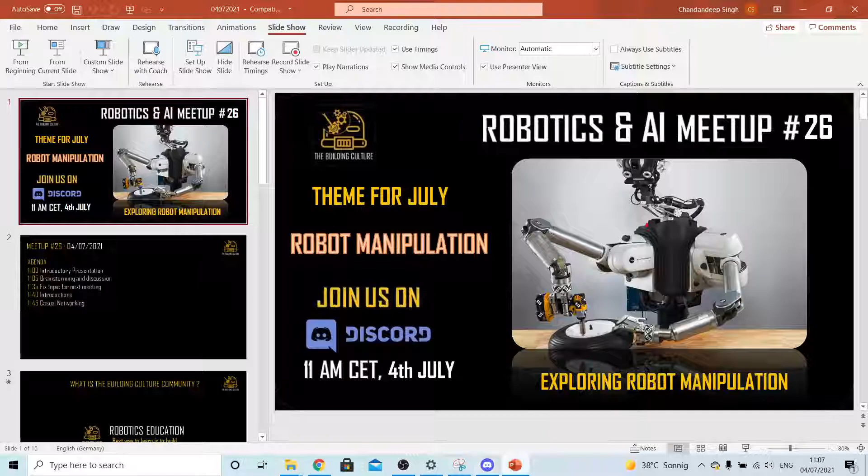Okay, so this is a Robotics and AI Meetup number 26, and the theme for July is robot manipulation, generally talking about different applications of it. Today's session would be exploring robot manipulation in general, and in the subsequent session we'll take up one particular application and dig deeper into it, try to understand maybe one pipeline, and also deconstruct a few existing products in the realm of robot manipulation.

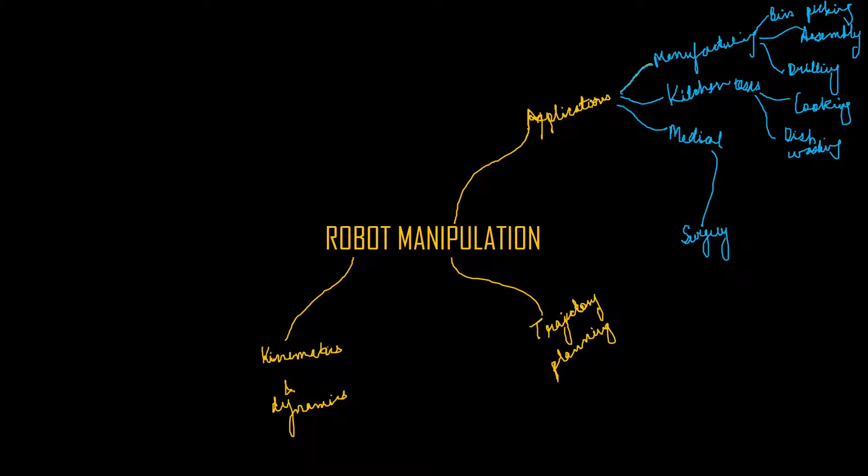Yeah, so bin picking would be one part of it. So about other subject aspects, maybe we can get back to the subjects now. So these are some applications.

Of course, artificial intelligence. Maybe we can just have one broad category for all these algorithms that we have. Computer vision we can add as another one. No, actually, computer vision itself is another subtopic in robot manipulation. Like we have visual servoing in robot manipulation. I think it should come as a subtopic under robot manipulation, not directly under artificial intelligence. But it's a subcategory of artificial intelligence essentially, right?

Reinforcement learning, machine learning, computer vision, all these things are actually under AI. And even if we are using machine learning, that's directly applied to robot manipulation, but just to give a category of all of these things.

Okay, so with computer vision, we don't need to expand this too much, because computer vision has plenty of topics. But visual servoing you mentioned. Even for measuring parts in industries, for the metrical purposes, we use machine vision on robots.

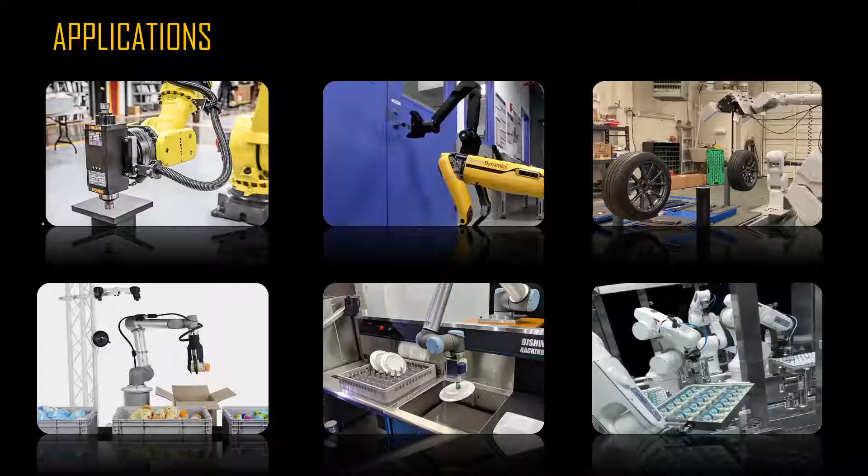Talking about applications, there's tremendous utility of robot manipulation in the real world - drilling and stuff, chamfering, drilling, maybe inserting a peg in a hole. These manufacturing operations, measurement, teleoperation, all these kinds of things, and opening a door, which can also be in office areas, homes, and a variety of different applications. Then assembly of wheel hubs, and pick and place - this has very wide utility in a variety of different industries.

This can be done, then there's dishwashing, then there were kitchen robots. We covered one aspect of robot manipulation in a lot of detail, right?

How computer vision pipelines can be used to actually cut vegetables, boil, cook, or do all these kinds of operations, and also for packaging. So there's actually a lot of applications that we can cover as well.

Is there any other interesting application anyone wants to talk about? I think we covered broadly what would be interesting.

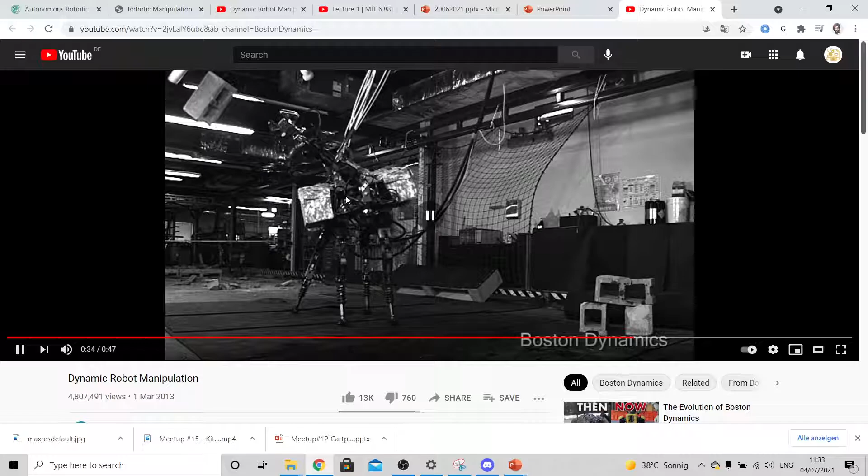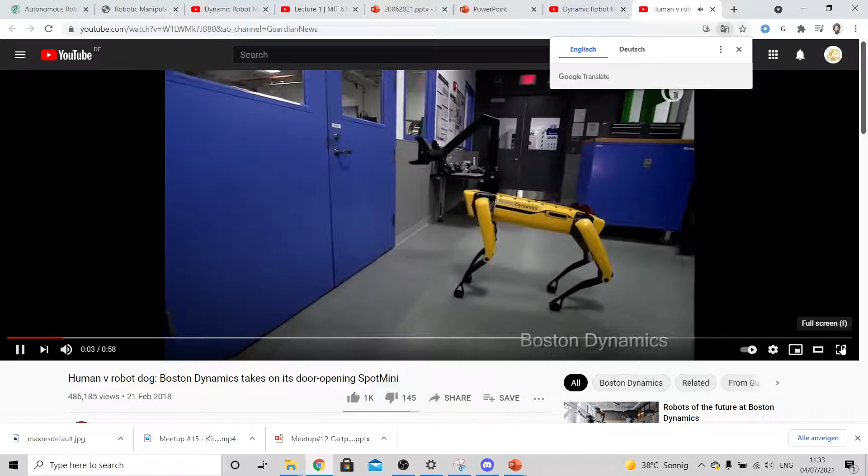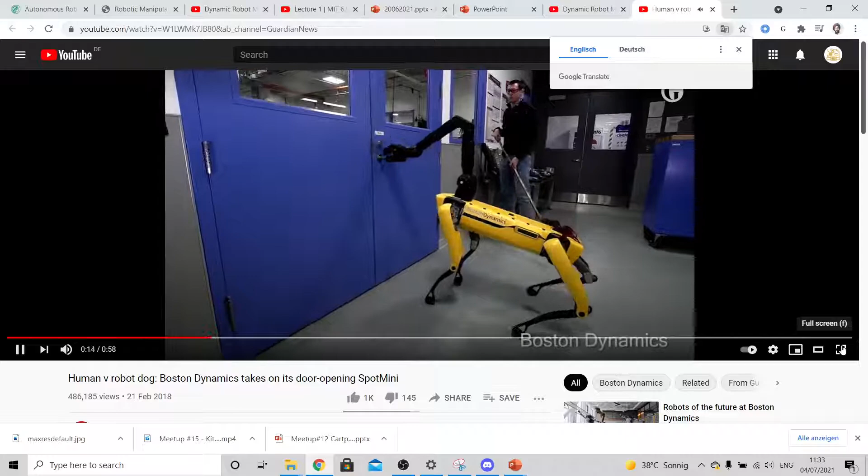This is one example of door opening. This one probably most of us have already seen, right? Yes, so this one adds more challenges - despite the fact that opening a door is a challenge in itself, couple that with the difficulties this guy is adding.

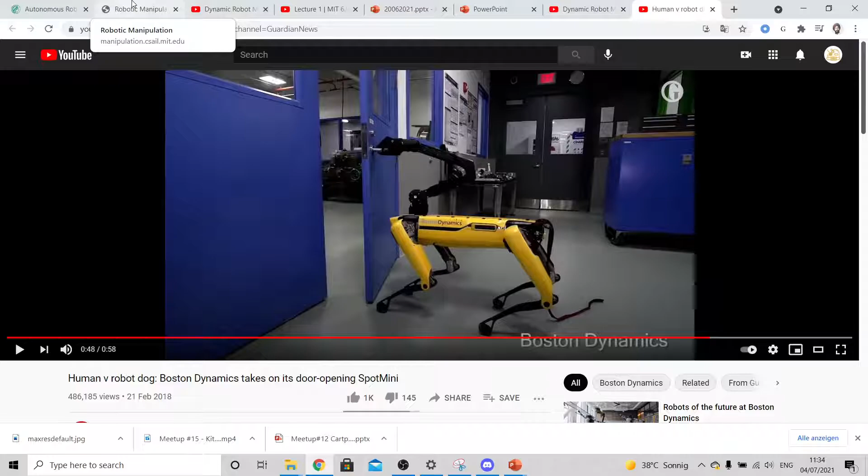Do you guys have some suggestions on videos, articles, or anything related to manipulation? There was actually one - Kuka Robots playing tennis. I think everyone must have watched it already. That table tennis one, yeah, it would be an interesting one.

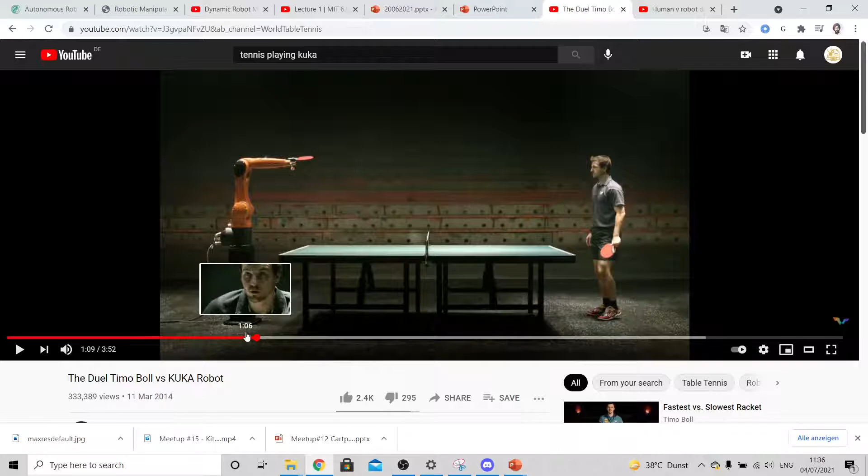I think this part was where it was actually serving the ball. Here we can have a look at it, that's very close - complicated. I mean, how did it plan in that way, its motion itself, to serve in that particular way?

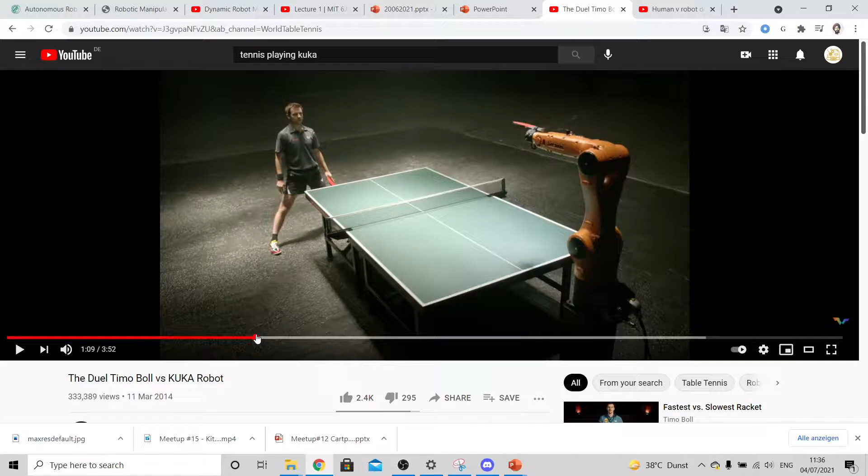Yeah, I think it was must be predefined. I think the ball is also kind of mounted here, so was it holding it? Okay, it will leave it. Otherwise it would be super challenging, right? If someone throws the ball from outside, then it would definitely have to track the ball as well.

Yeah, definitely. And this one I think they've mounted first. Okay, but if you see how it serves, that also is very complicated actually. Let's see it again.

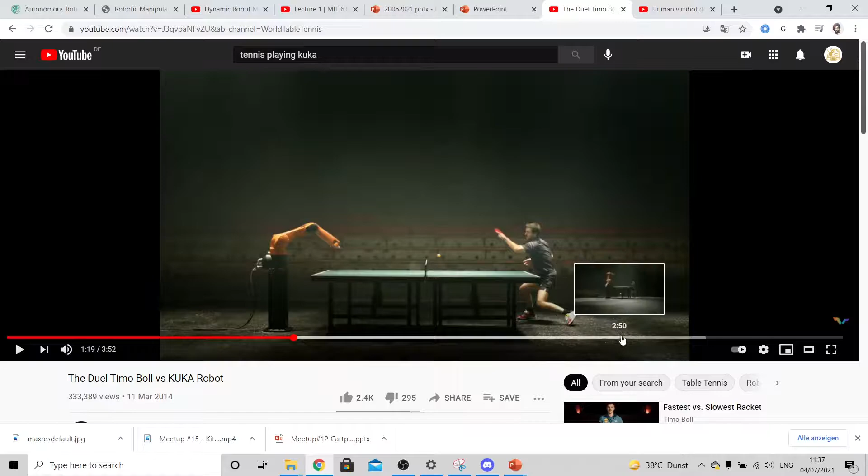Does it have a camera mounted on its arm or is it somewhere else? Not sure, I'm not sure if this is shown in this video. Actually this video was more for advertising, I guess. Advertising, definitely. But I'm not sure, let's see if there was some camera or something.

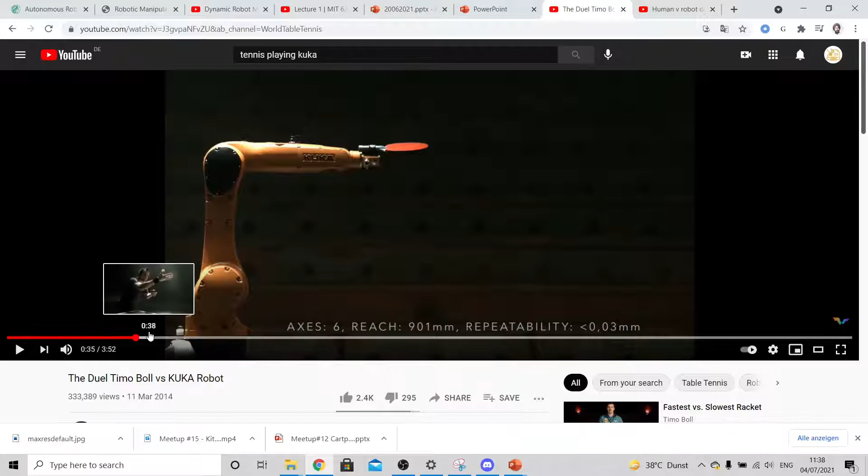Actually, if the ball is kept on the robot itself, then for serving it just has to do a series of predetermined steps. But yeah, I think after the main playing part is where it needs a camera. Nowadays it can learn itself using imitation learning - one can manipulate the arm in that sense, and it will do it the same many times till it achieves replicating the task.

Yeah, I think imitation learning - or okay, there was one video on imitation learning itself. I forgot, it was on Steve Brunton's channel. I forgot. Can you pull up the Steve Brunton reinforcement learning video?

Anthropomorphic means like human form. This video is a bit slow, so bear with me, but it's just 2 minutes in total.

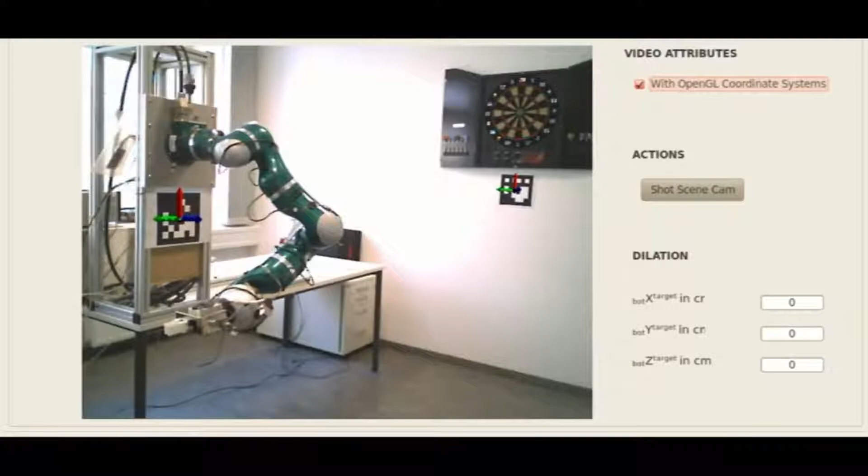Where is it hitting actually? You can see in the bottom. Ah, okay, bottom corner. Ah, so all are at the center.

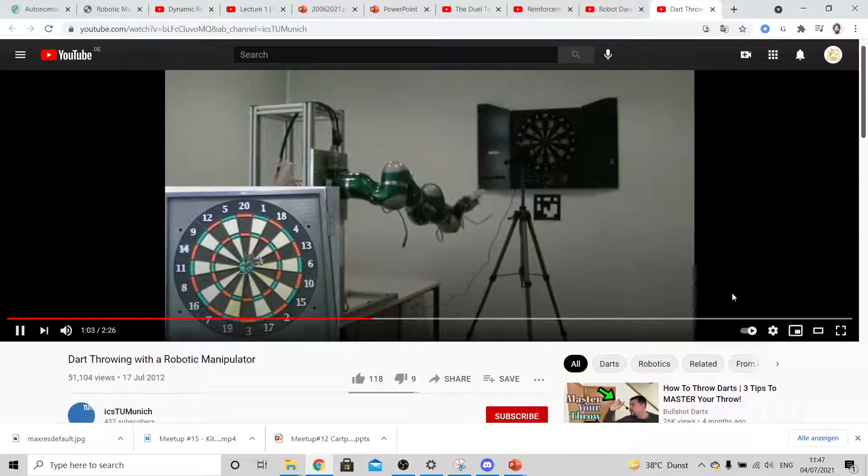How old is that? I think 2012, so it's pretty old actually. My God.

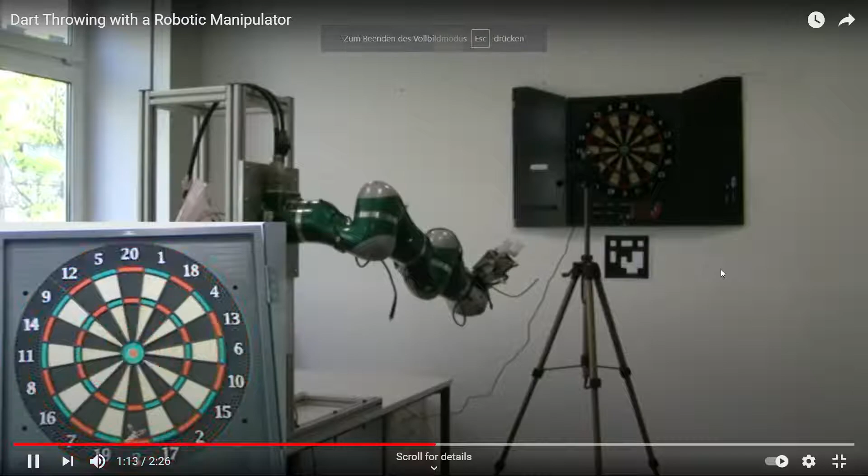Is there any paper attached with it? Is it based on any paper, probably? I think probably there would be because it's from TU Munich. Dart throwing with robot manipulator, we can Google search it.

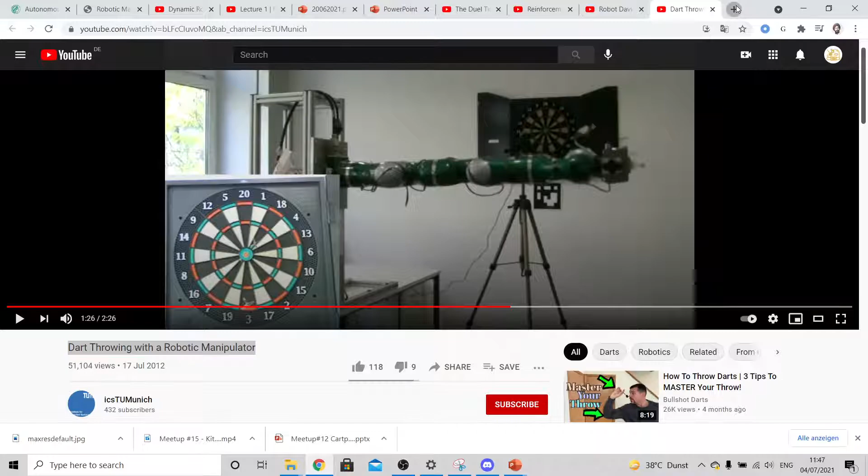ICS TU Munich, okay I will find it. Humanoid robotic systems, dart throwing. I think on this website probably you'll find a research paper. So Institute for Cognitive Systems. I think somewhere I can find it in the Google Scholar section.

I think on this website you'll be able to find it, and we can also check what other things they are doing. There's robot human collaboration combining artificial skin signals and constraint based reactive control, sensitive skin, so this is a different direction. Active inference, body perception, and action for humanoid robots can be another major subtopic under robot manipulation. Yeah, for sure.

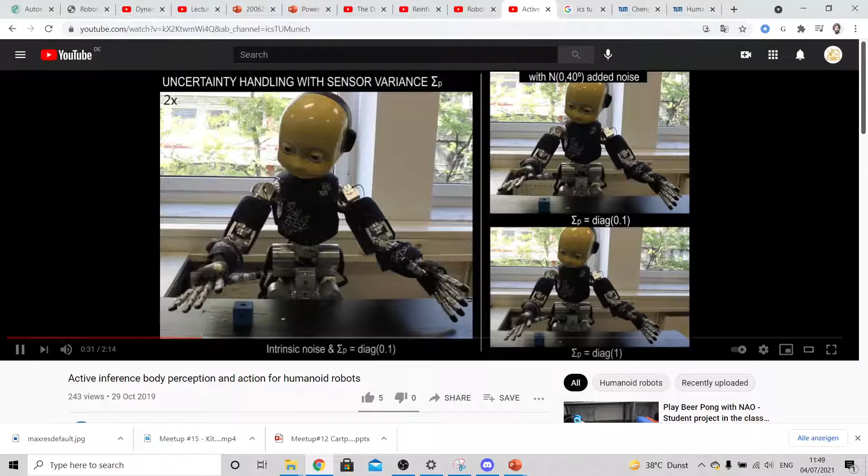Action. So it's actually going to press this button, I guess. Or maybe it was just going through this trajectory. Active inference, body, sensor, sensor. Arm reaching.

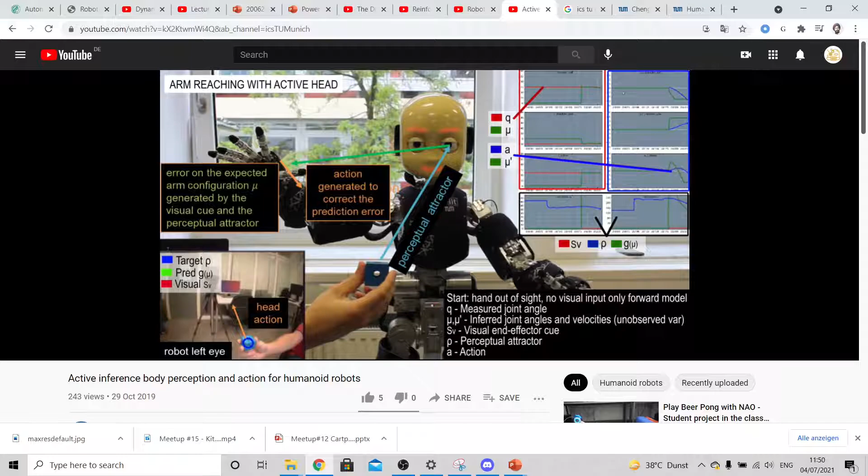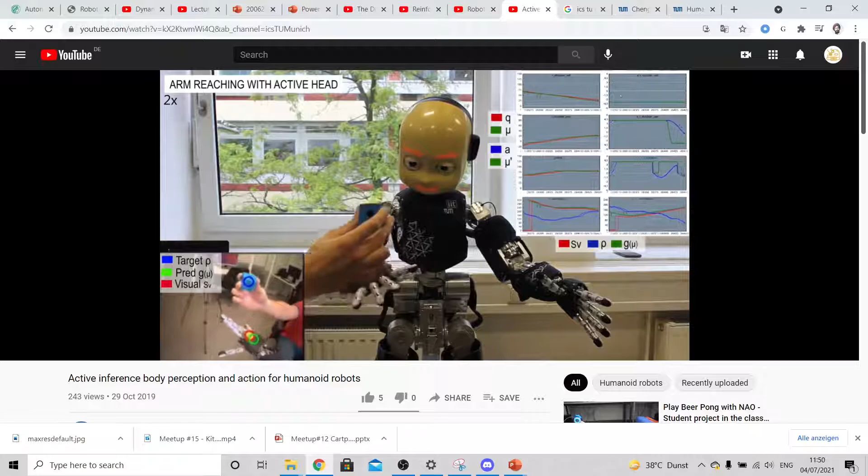Yeah, okay, so it's going to track it and then reach it.

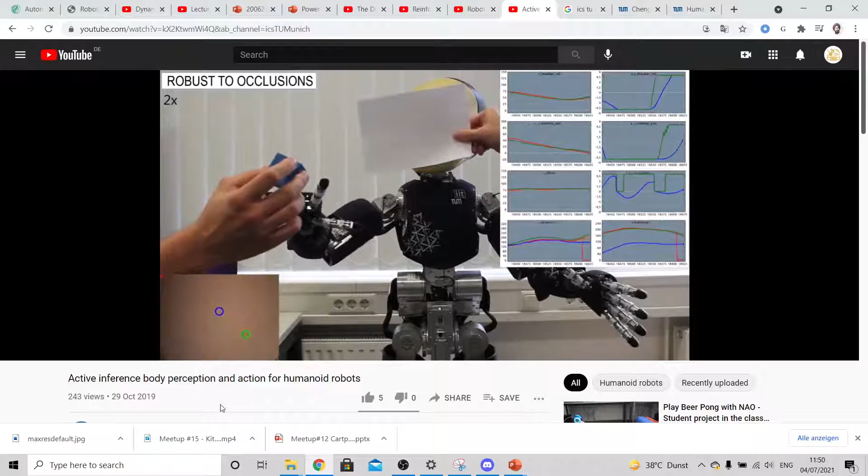That's nice. Oh, so tracking even after occlusions.

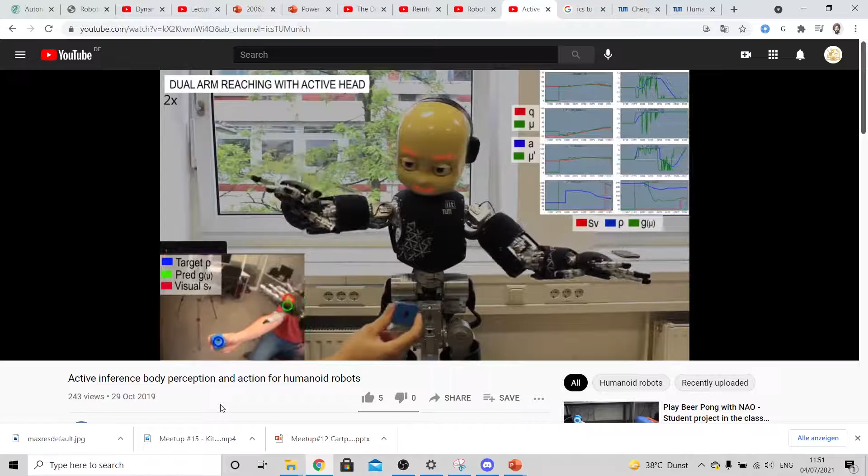So this is with camera. Actually, there's also multiple other sensors that can be used. Tactile sensors are also used, and actually, there's this research paper that we discussed here, right?

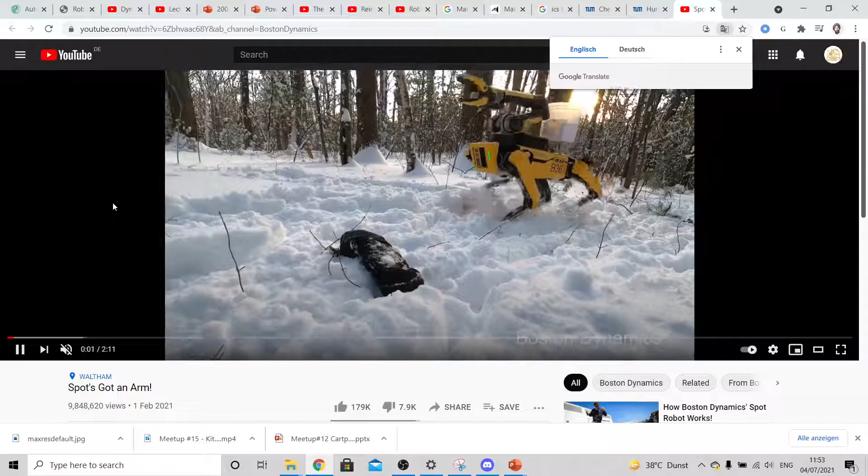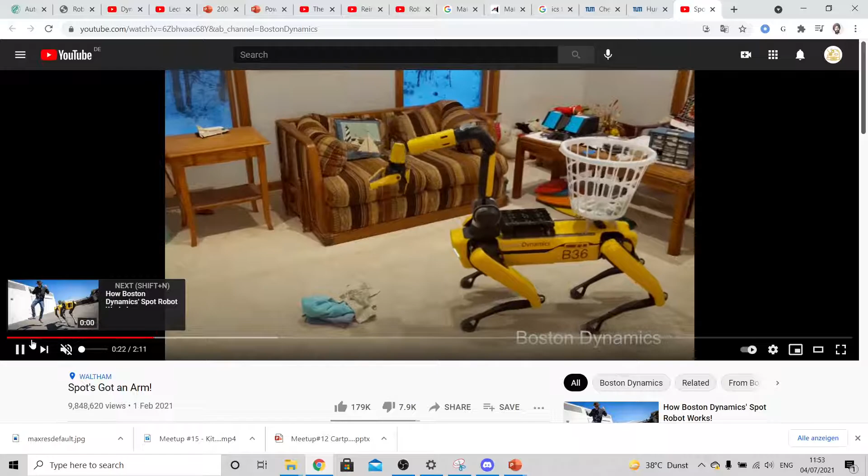And this one is again Spot. I guess you would have definitely seen this one, right? So again, I think here what would be interesting is, I'm not sure what object this is here that it's trying to pick.

Yeah, but it's a deformable object, right? It changes its shape, and again, this one is also a deformable object that it's picking. I guess sensing would be very crucial in the case of deformable objects because, yeah, actually my thesis is also in this direction, sensing deformable objects.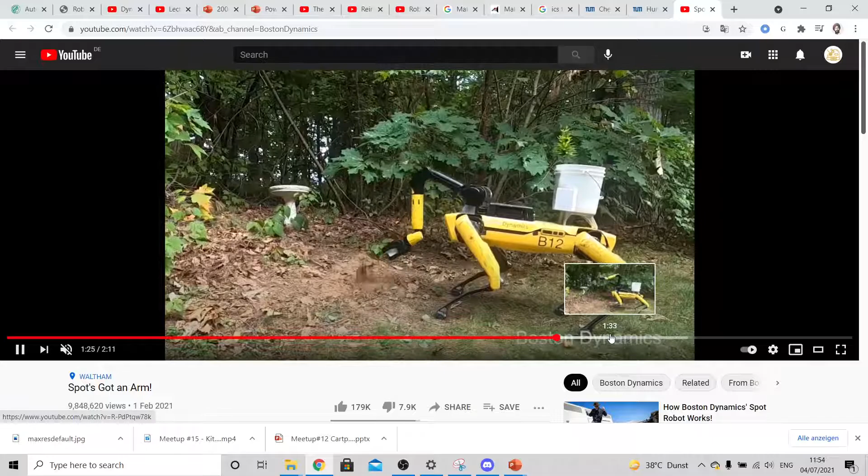Oh, this is an interesting application. I didn't think about this. Planting.

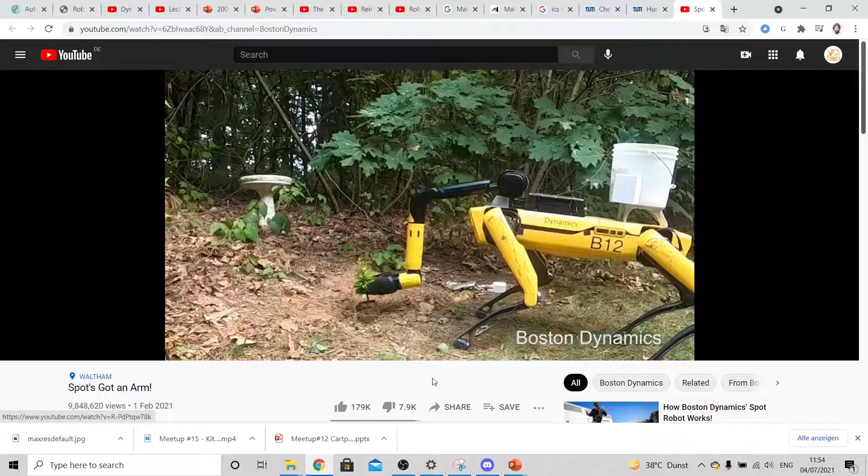Their research is not open source, right? But definitely. Sorry, you mean Boston Dynamics' code is not open source? The research, I think it's not open source, right? Yeah, I'm not sure, I don't think so.

This was one, and yeah, this is deformable object manipulation. Actually, recently Google had updated something. So this is one, actually this is pretty close to my thesis here.

Yeah, so given it uses deep reinforcement learning to actually now flatten this piece of cloth fully. Yeah, how does it figure out that?

So it's taking, actually it's capturing images, and the images are states in reinforcement learning, right? Okay, so images are states, and then in the image, based on the pixels, it selects pixels, and then those are transformed to actions, and then that action is made to do pick and place. What is its policy?

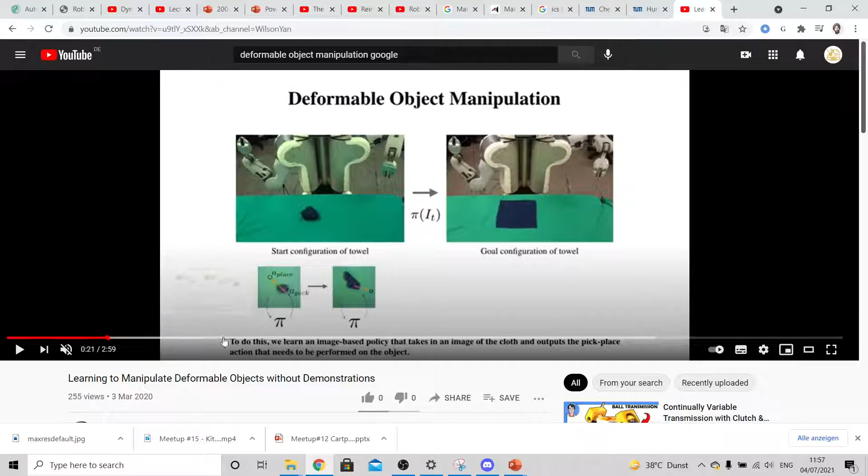So here, in this case, it's actually trying to open this fully, and also the goal state would again be matching the image with this thing.

So actually I can also explain this particular paper, because I've read this in one of the sessions maybe this month. So yeah, it will match it with the cloth one.

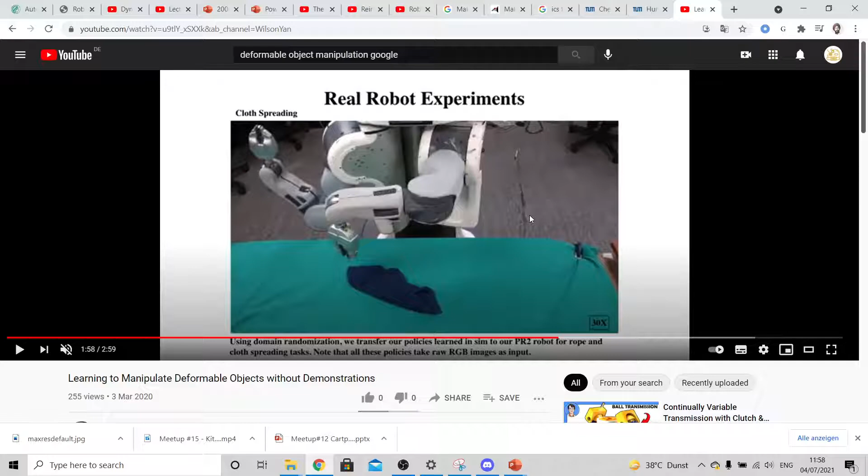So let's say this is an intermediate position, right? Then an image is captured, and it will overlap it with the ideal image of a fully flattened cloth, and maybe the overlap would be, let's say, 50% or something, and then it will do actions based on the policy.

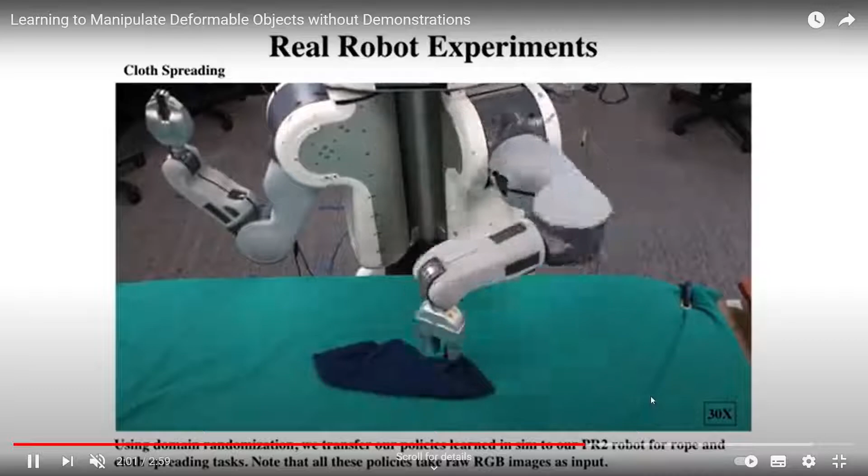And then it will slowly learn to open it. But if we watch it, then it takes actions, but it's 30x, so it would actually be very very slow. This is a very complicated task to do. So it eventually flattens it fully.

This is one thing with fabric manipulation, and there's also this Google deformable object manipulation research. Google has good research in this area - learning to manipulate deformable objects, I guess. This one is for different tasks, like placing an object into a bag and then moving the bag there. This is super complicated.

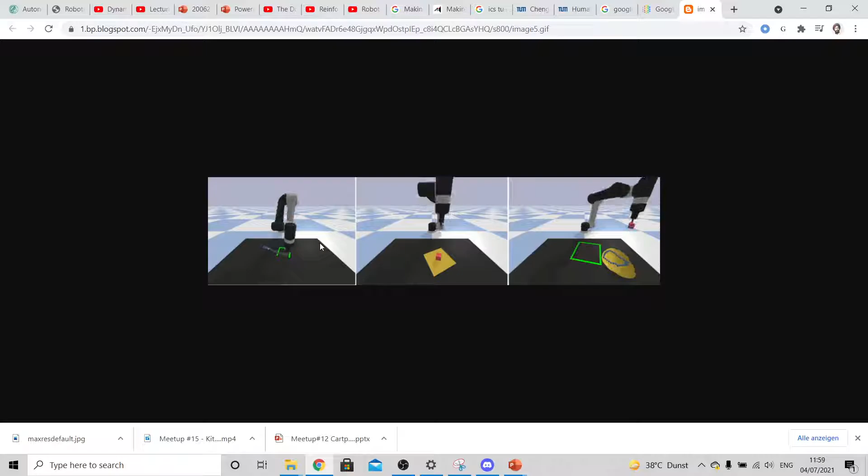So it's placing it inside this bag, now packing it inside a bag, and here it's probably just moving it inside this area. Yeah, this one uses different arrangements. I haven't read this article, but this is also interesting. Maybe I'll add it in the chat room if you're interested, and you can read this later as well.

And for robot manipulation, there's this book by MIT on robot manipulation, and they do have exercises. I just came across this, and I think this would be a very interesting way to learn because there are exercises along with it. The first one is just basic getting familiar with the robot, then pick and place with kinematics, then pose estimation involving computer vision, and then bin picking. It has a lot of things, so I highly recommend it, and there are Jupyter notebooks in all of these exercises.

So this one is interesting. Moving to deformable object manipulation again, I think this would be interesting.

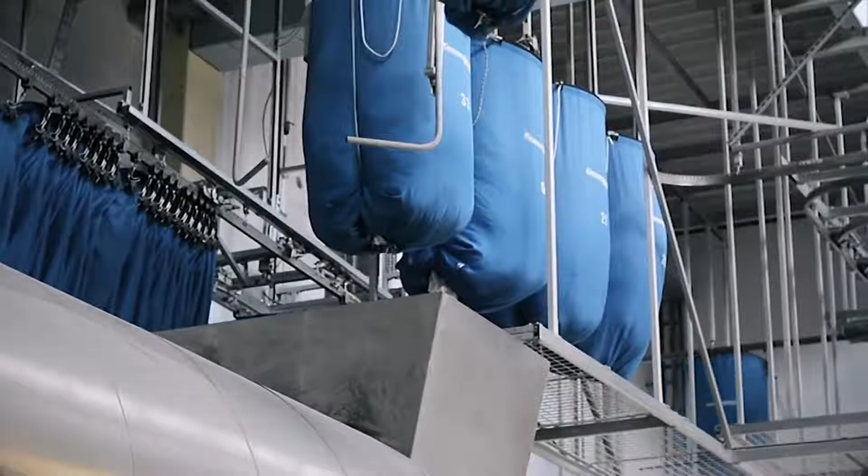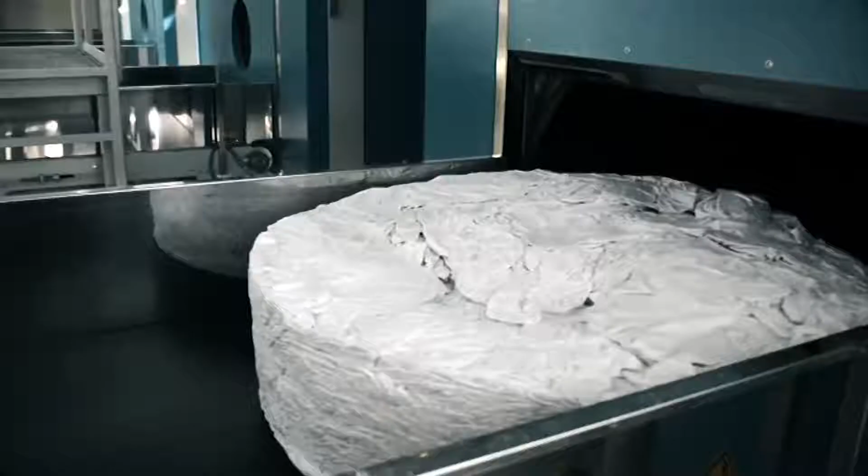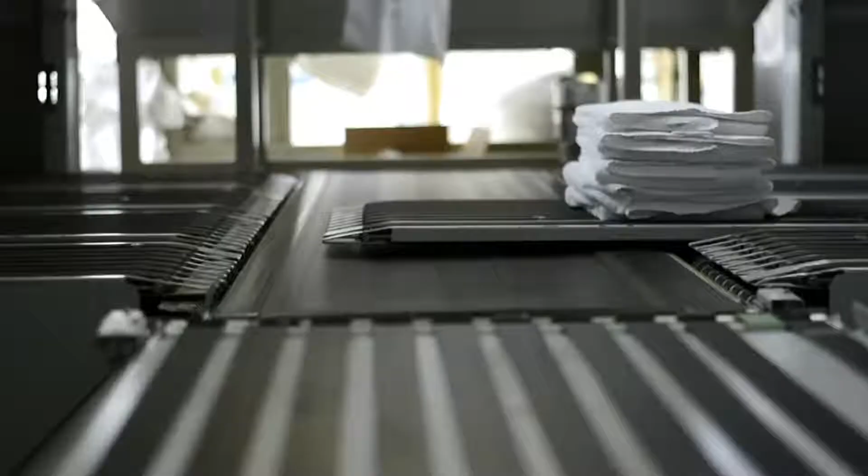Did you ever waste a thought on how much cognitive effort goes into folding a towel? Probably not. As a human, you can easily recognize seams and wrinkles, but to robots this task presents an extraordinary challenge. Let's take a look at a typical industrial laundry process where thousands of towels are handled each and every day. The dirty towels are loaded into a washing machine. Afterwards, the water is pressed out and the towels are moved to a dryer. Following this step, they're automatically delivered to a folding machine. This is where the process still depends on human labor. Now the towels are picked up by a worker, smoothed down, and placed on a conveyor belt. From here on out, the towels are folded and finally delivered to a wrapping machine.

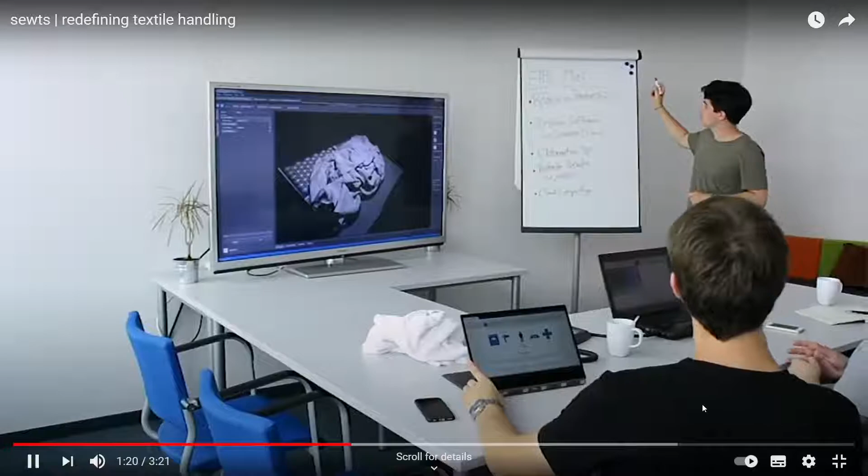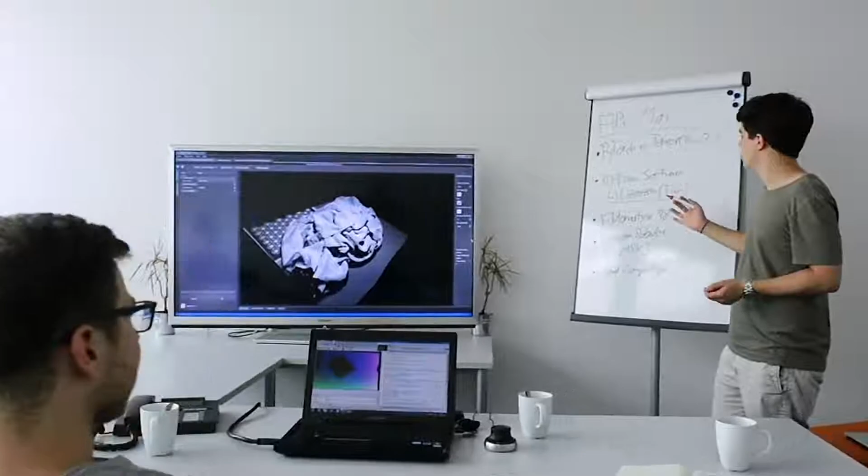To speed up this process, we provide a system capable of closing the gap to a fully automated industrial laundry. We have been working tirelessly on an intelligent handling system for textiles. To achieve this, we use the newest camera technology and highly sophisticated computer vision software, combined with deep learning methods and application-proven gripper systems. Our underlying principle is simple: we aim for a solution best suited for all applications of textile handling to deliver a truly astonishing result.

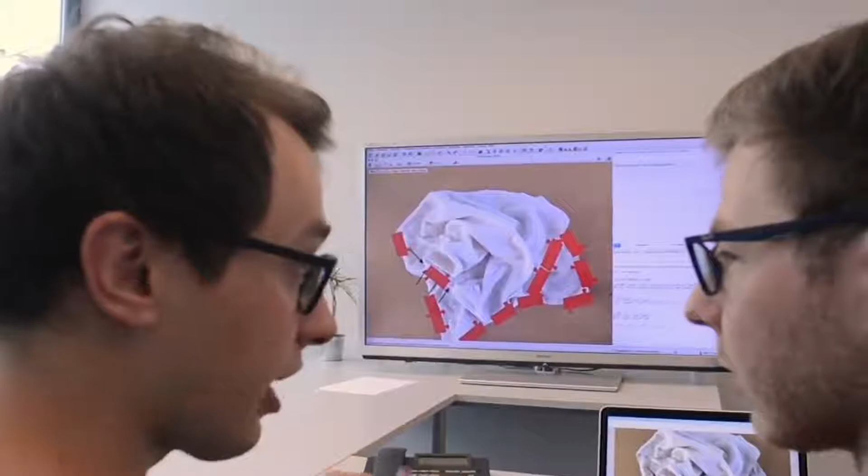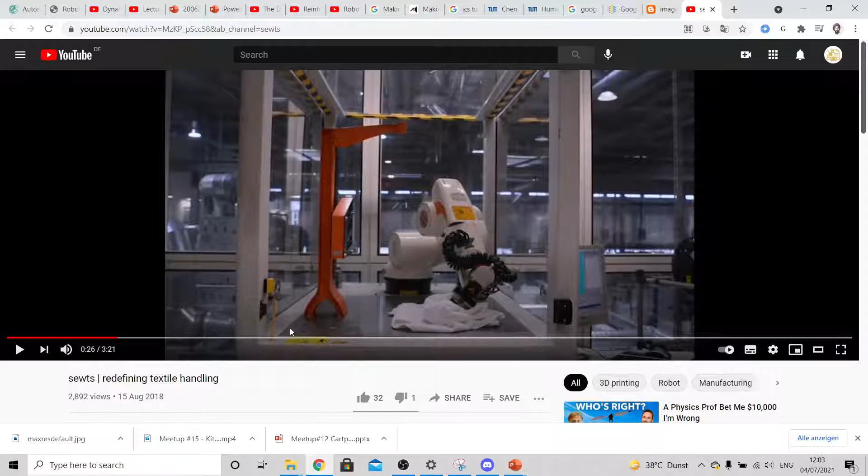So this is an actual industrial application for folding towels. They are feeding it to a folding machine, but all the other manipulation - moving it from the bin, then flattening it and everything - is being done by the robot itself. This is actually the startup where I'm doing my master's thesis currently, so this is a pretty difficult task that they're doing there.

And let's see, there's this dishwashing robot. This is also the next set of robots that could have a huge impact in the home. Has anyone seen this? Probably, I think this one is also very popular. Robots with hands that are able to move objects in the world more like what a human could do.

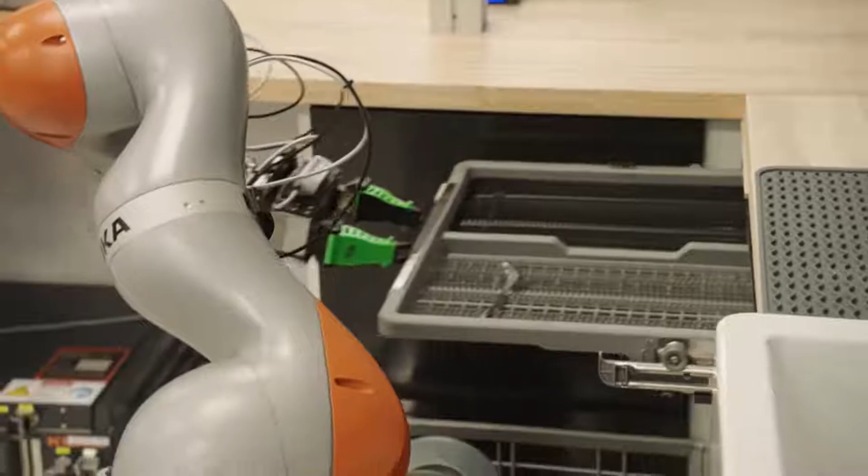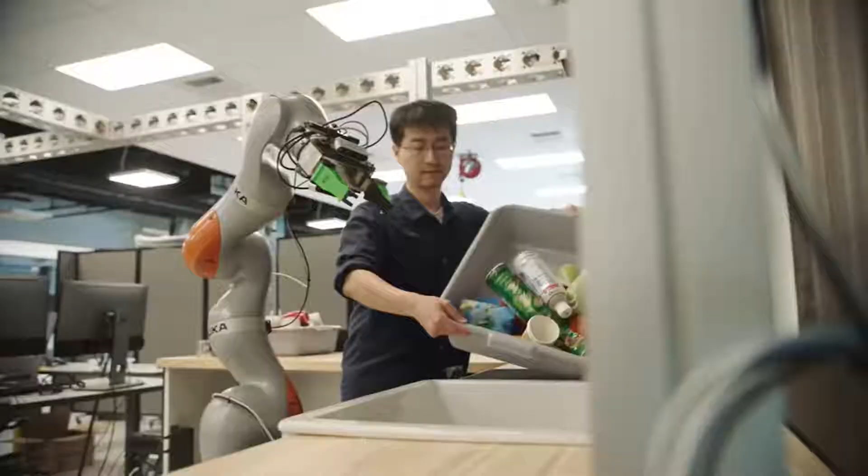Let me tell you what we're looking at here. This is actually a factory robot. We've staged it in front of the kitchen sink and the dishwasher, but we're asking it to do an extremely hard task. Let's think a little about what it takes to make a robot load the dishwasher. It needs to be able to recognize whether an object is a mug or a plate or silverware, or whether it's something to be discarded. It needs to understand the shape of that object, where it is in space, its orientation.

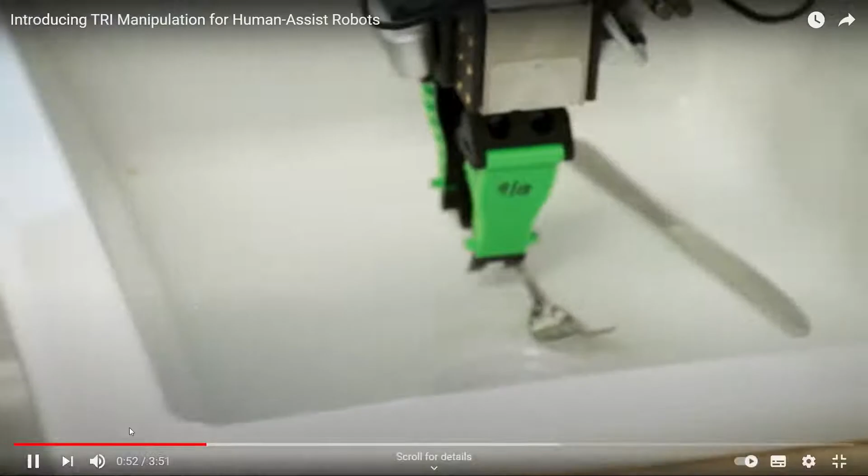One of the key capabilities of these systems is using feedback in our control.

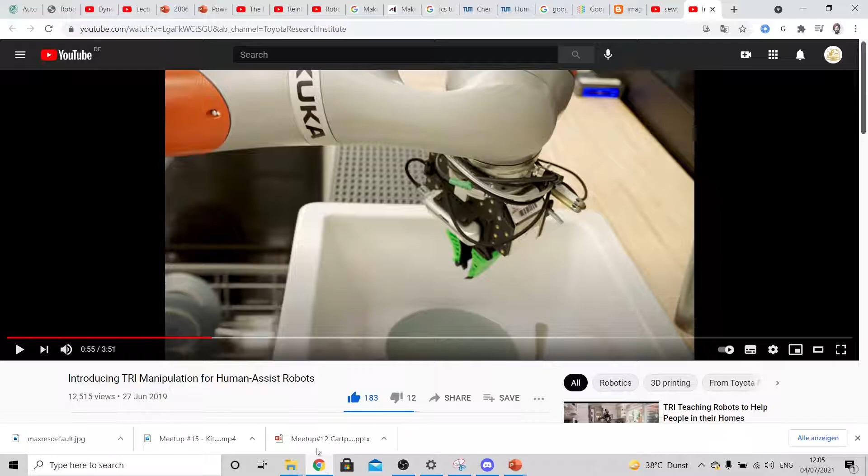Algorithms. Is it better now?

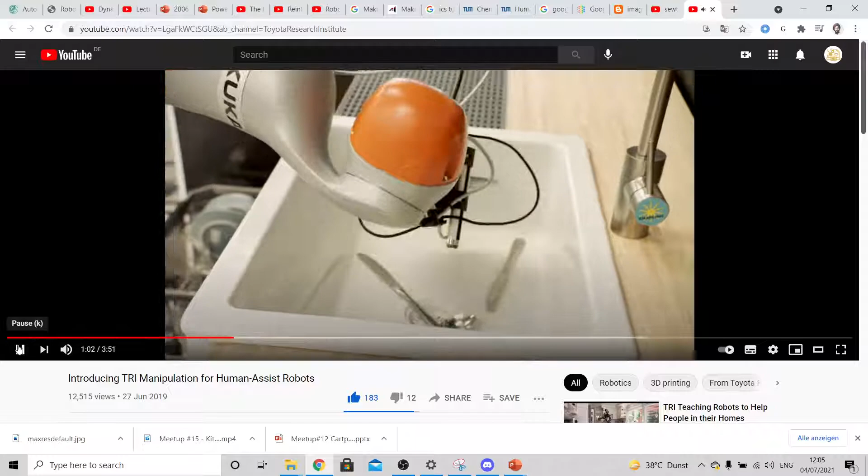When we pick up the plate, we're constantly monitoring the forces we expect, to see both at the fingers and at the wrist of the hand.

Discord voice can be increased. Just a minute, it will increase your voice. Sorry, I'm not sure if increasing my system volume does much, but yeah. How is it now?

Using cameras to align the hand to the plate, it's better. Okay, so it did help.

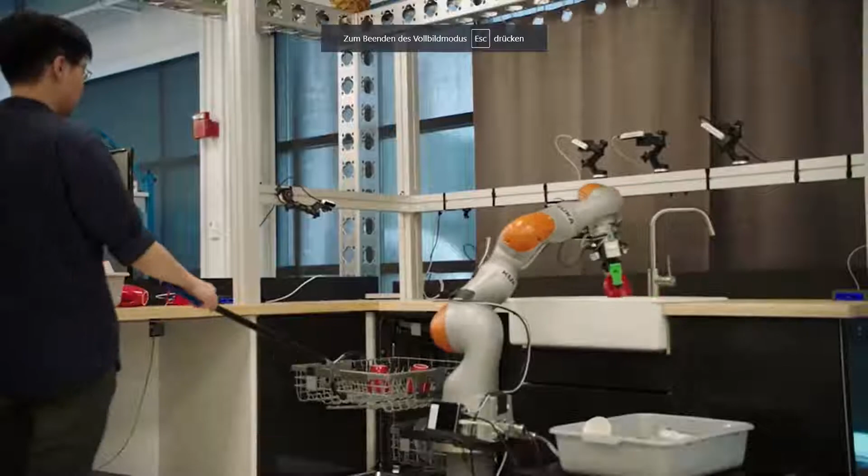This makes the system much more robust. If someone comes along and closes the drawer on the robot, it's actually reasoned enough to set the mug back down on the counter, open the drawer back up again, and finish the task.

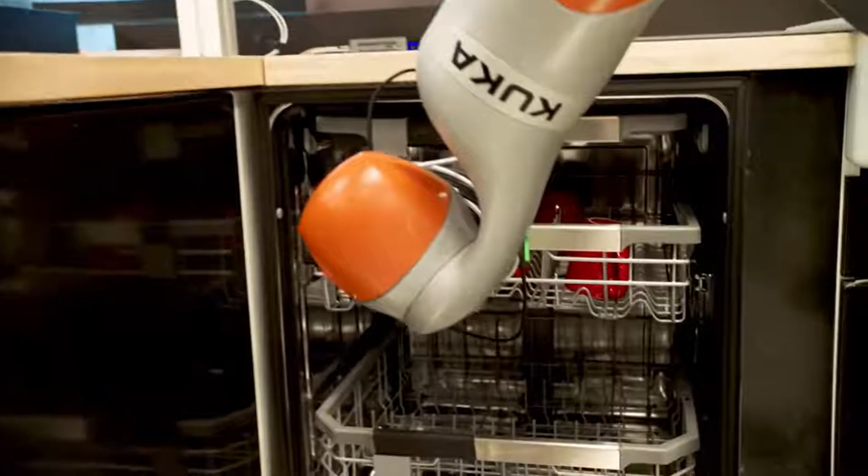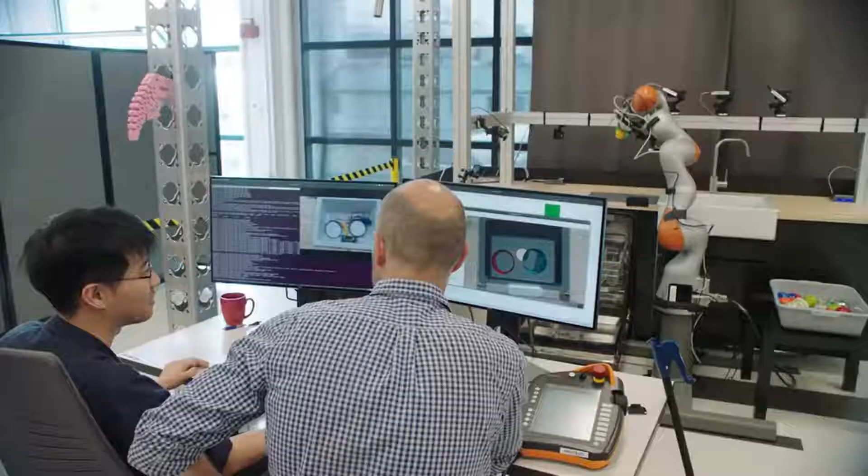Traditionally, robotics researchers have used physical testing to design their algorithms, but that's just too slow. We've seen a dramatic increase in the performance of our system. One of the big reasons for that has been our increased capabilities in terms of simulation and testing. We want to be able to test our algorithms in software the same way we test them in hardware.

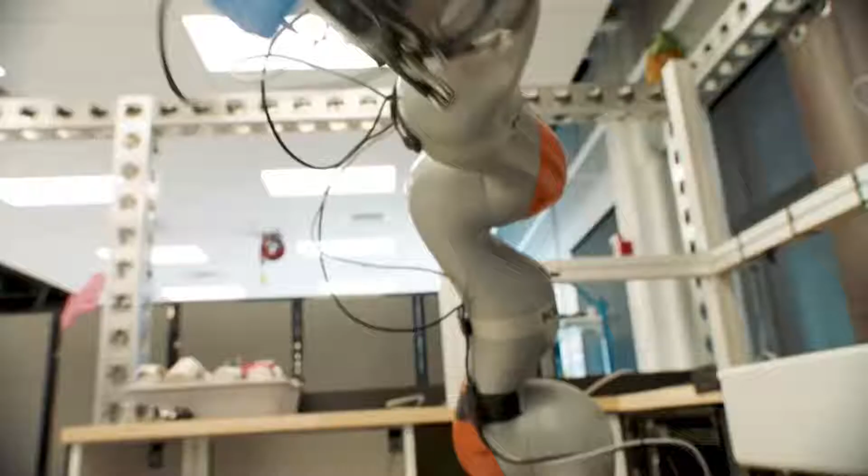In simulation, we can run many more tests and more diverse tests than what we run in the real world. Every night, we generate random configurations of the sink with random objects, trying to find the corner cases, the rare events, the situations that we never thought to try in physical testing.

So this is a typical problem actually. When there's objects in a cluttered way, you have to pick those and arrange them. So you have to know the object's orientation and position. So 6 degree of freedom grasping needs to be done, or maybe even if it's of a lesser degree of freedom, you still need to identify at least the XY position and orientation properly.

So this is one particular challenge, and this one we already saw, right? Mobile robotics with the kitchen one. So I'll just go to the main part.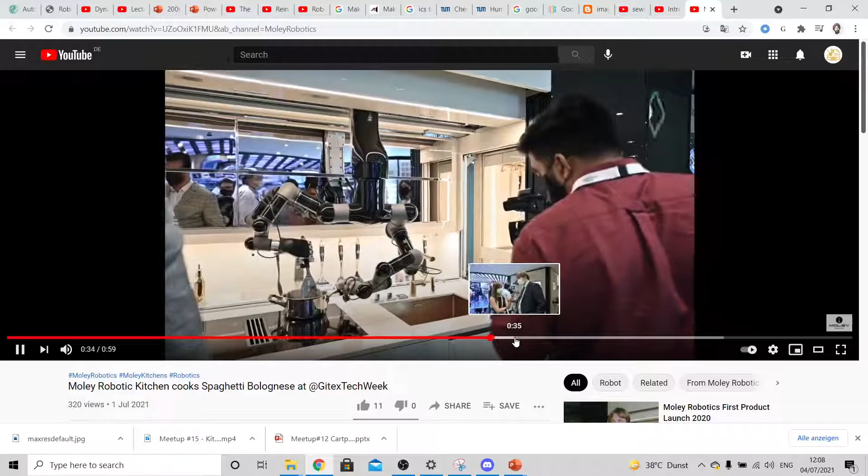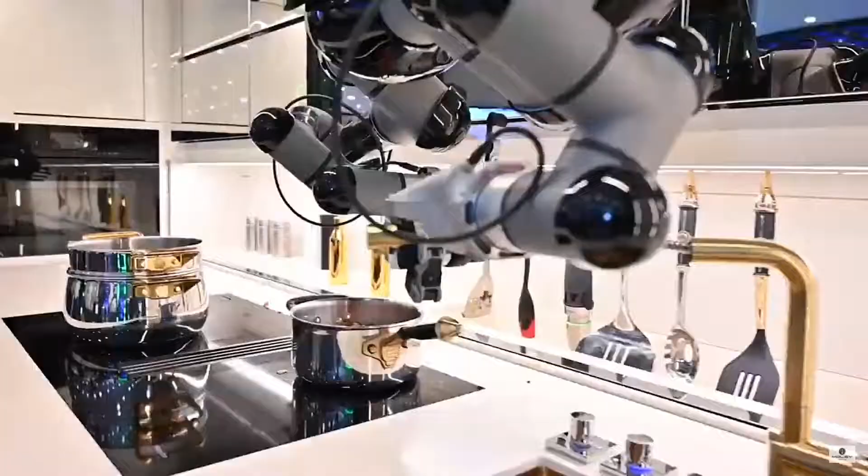So this is actually like making proper recipes, and it's probably using imitation learning. It actually collected data from different chefs while they were preparing their dishes, and that's why it tries to give it a more realistic feel, like with reference to the last video.

The collaborative robots, I think Universal Robots, their collaborative robots, I forgot what it's called. Nowadays they are used in industries with workers. In Bajaj automation, nowadays workers work along with the UR5, yes, cobots. It's pretty much dominated.

Yeah, this is another one, I think on Universal Robots' official channel, we'll get plenty of examples of robot manipulation, like machine tending and welding tasks using this.

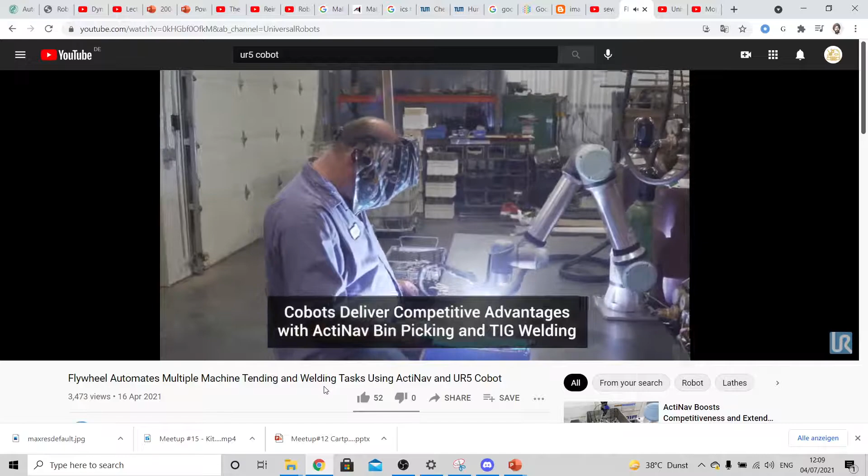Our company is called Flywheel Supply. We're stationed in the Midwest in Northwest Iowa. So this is actually a cobot, operating with the person for welding, steam and boiler controls, valves, and gauges for both industrial and some government type of applications.

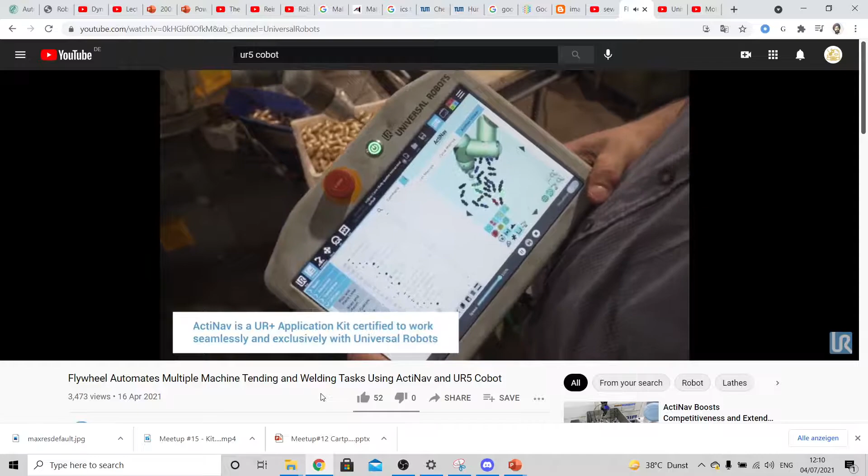I saw a lot of labor involved that could be streamlined with a robot. The only way that made sense for us to put a robot on a machine tending application was to be able to do randomized bin picking. If an operator is to stand there and line the parts all up for a robot to pick them, it would defeat the entire purpose of using the robot to begin with. The cobot has to be able to pick a wide variety of part numbers.

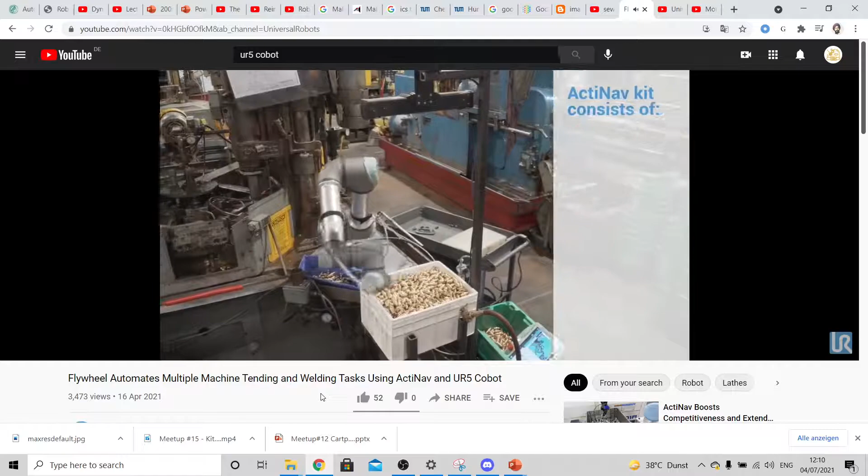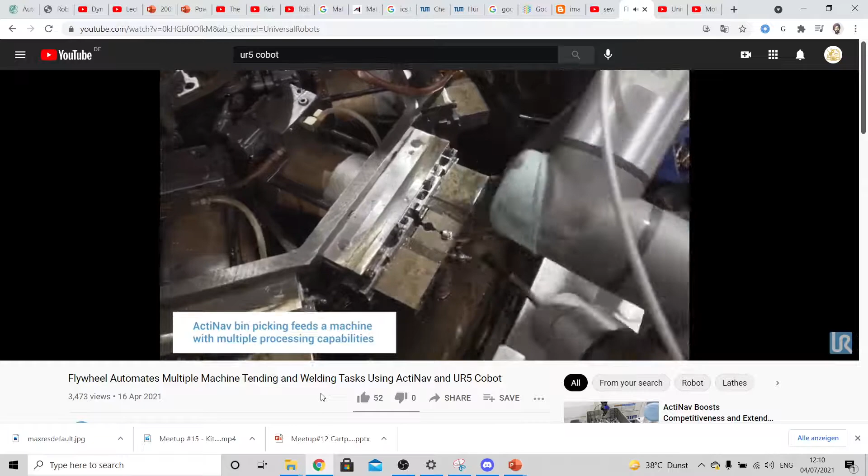It's got to be able to pick up oily parts, pick up randomized parts just laying there, and then accurately place them so the machine can process them in a timely and efficient manner. After the robot picks the part, it places them in the jaws, and the machine indexes around to multiple stations to do multiple tasks, including drilling, chamfering, threading, a wide variety of applications.

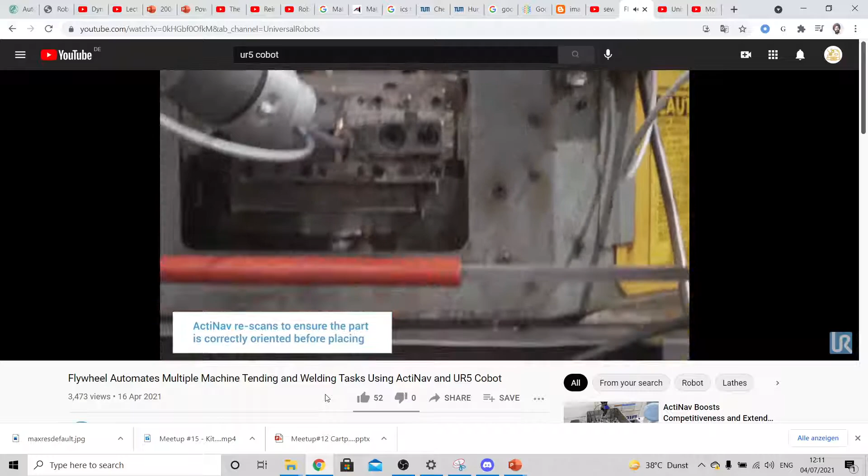One of the biggest advantages to ActiNav is that we're able to do a bin pick with suction. We then verify suction in the logic of the program. Then we represent the part to the scanner if we don't have a part present at that point, or if the image sensor notices the part is changing position and would make an unplaceable part, we then put the part in a region.

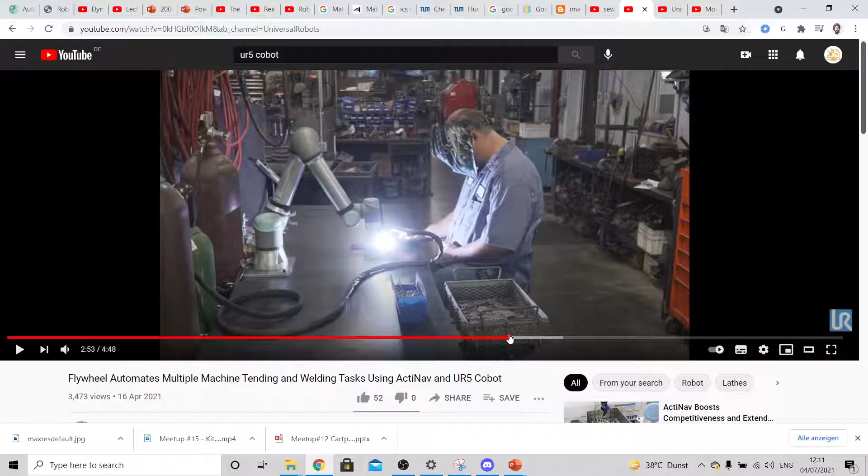Bin picking is actually one of the major applications. So there are also jobs emerging a lot in this sector, cobots, and yeah, again here is probably a similar application.

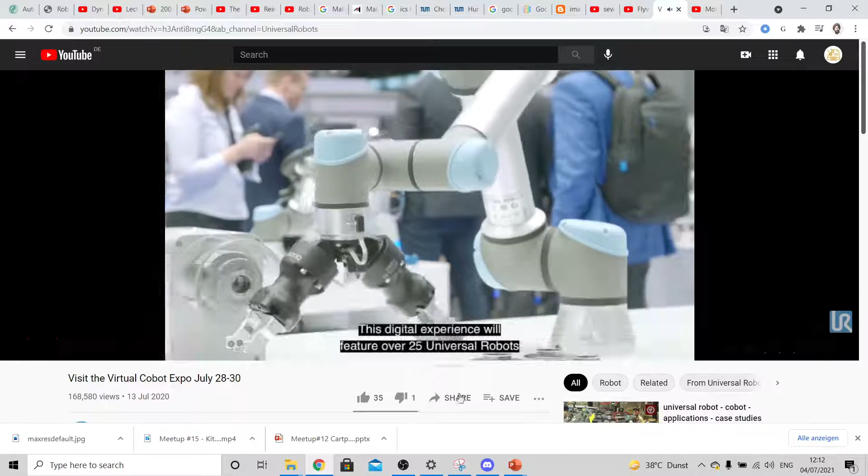Okay, yeah, so does anyone want to share something as well? I've been sharing for a while, so.

What's more, painting, paint jobs was another application. It's pretty basic. And what else? Actually, this is a different kind of painting, but this is also interesting. But yeah, in paint jobs, I think it's more in isolation, right? So not in a cobot way.

Probably, I'm not sure, actually we can check now. Painting jobs, robots. Maybe I'll open this one in a separate tab. Yeah, so this is more in isolation generally, with paint shops and stuff.

Yeah, let's just have a look at this Cloud one.

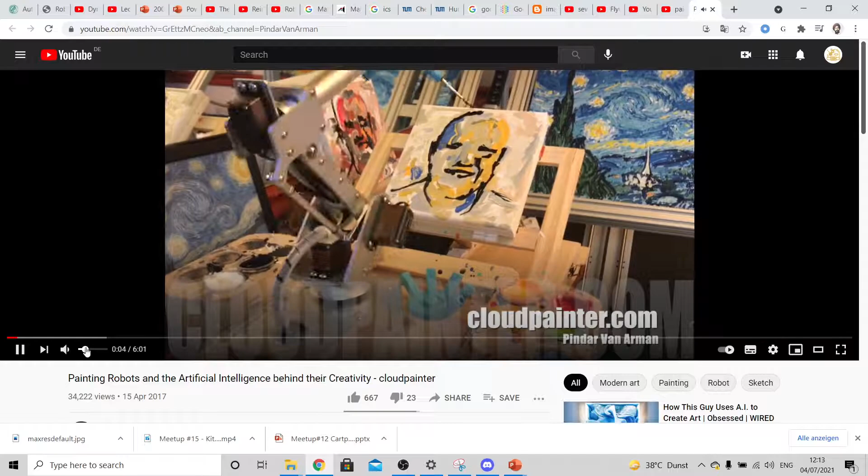Cloud Painter is a network of connected computers and robots that we're using in an attempt to replicate artistic creativity, and in doing so experiment with artificial intelligence. We try to have it make as many of its own creative decisions as possible, and it's getting pretty good at it.

So here are several paintings made by Cloud Painter. You got several of my family, you got a couple reproductions, you got these abstract portraits right here, and those are the ones I'm going to go into detail about today. I'm going to walk you through the individual steps that went into creating the abstract images behind these portraits, and I'm going to let you consider those and decide for yourself just how creative Cloud Painter is.

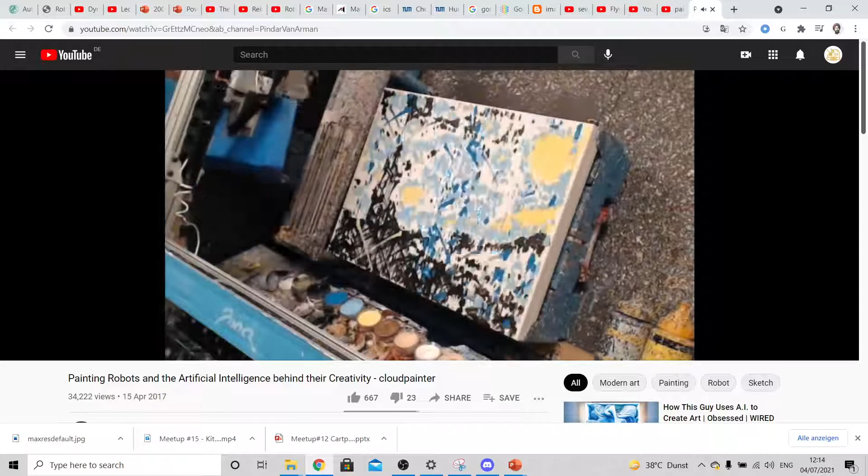There's two different things, I guess. There's this Cloud Painter, and that's probably like just printing layer by layer and stuff. Cloud Painter.

After a couple hours of painting, the AI finishes with its best attempt at recreating the pastiche. At this point, the painting usually feels unfinished to me, so I take direction of the robot and touch it up a bit. Small touch-ups only, but these touch-ups are pretty revealing because they really show how much more.

So manipulation is being done just for touching up the robot and trying to reproduce it, I guess.